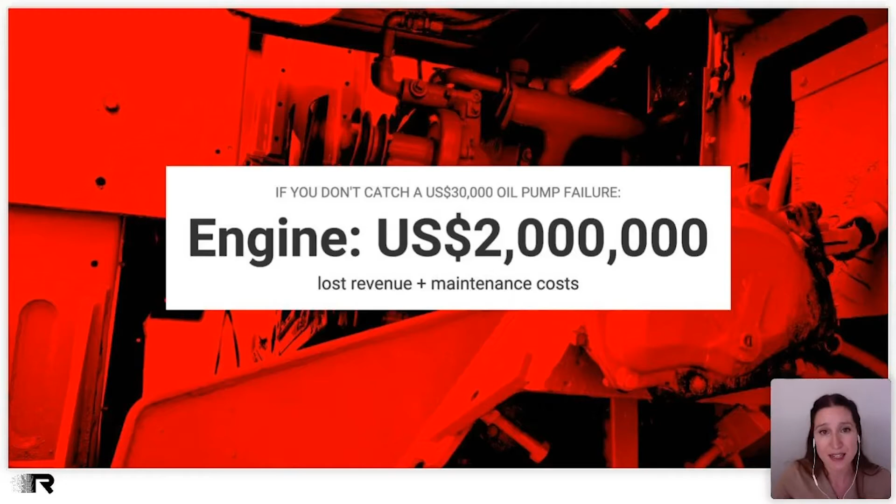That's why even though most of the bigger mining companies are collecting data now, and some are even doing advanced analytics, they're still struggling to make enough sense of that data to prevent catastrophic equipment failures. That's why they're still spending anywhere between 20 and 50% of their annual operating budgets on maintenance, with reduced revenue from all that downtime having an even bigger financial impact.

So after Teck, Kevin took a sabbatical to study artificial intelligence and machine learning. That's when he understood that these were the methods that could finally take all of that data he and Chris had worked so hard to get for the mines and turn it into actionable information.

So Kevin started Rithmik, and Chris and I jumped on board. Chris was as excited as Kevin to finish what they had started. And for my part, I really wanted to build a company where the sort of collaboration I saw between the two of them was the norm.

We also all wanted to help the planet, and increasing the efficiency of mining equipment provides a really huge opportunity to do that. According to a study published in the Journal of Sustainable Mining, when you increase the reliability of a mining haul truck from 60% to 75%, you decrease its fuel consumption and greenhouse gas emissions by 15.6%.

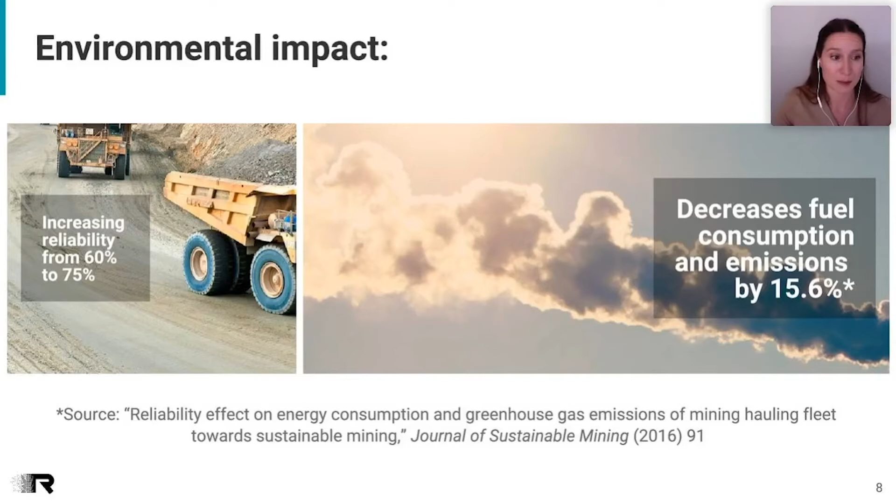So what we've developed is a product called Asset Health Analyzer, AHA for short. It uses machine learning to automatically sift through all of that data and draw people's attention to precisely where the issues are. And it does that early enough so that mines can take action to prevent small problems from turning into big problems.

And it does all of that in a very unique way, because throughout AHA's development, we kept in mind the fact that, as Mark was alluding to, there is arguably nowhere in the world where deploying new technologies is tougher than it is in a mine. In addition to some of the reasons that Mark listed, you're also dealing with things like constant topographic changes, extreme high and low temperatures, and in a lot of cases, you're also facing some resistance from people when it comes to implementing new systems.

So we're addressing those challenges in a number of ways. Underlying our Asset Health Analyzer is a rapid analytics infrastructure that lets us tune our AI models to a specific environment in less than a week. And the reason we do that is that the same sensor values on the same models of equipment can actually

mean very different things depending on the part of the world that you're in, what season it is, and the type of material that you're moving, which means that the kind of cookie cutter approach to artificial intelligence that might work in something like a fixed plant just doesn't work when you're dealing with mobile mining equipment. And our product takes that into account.

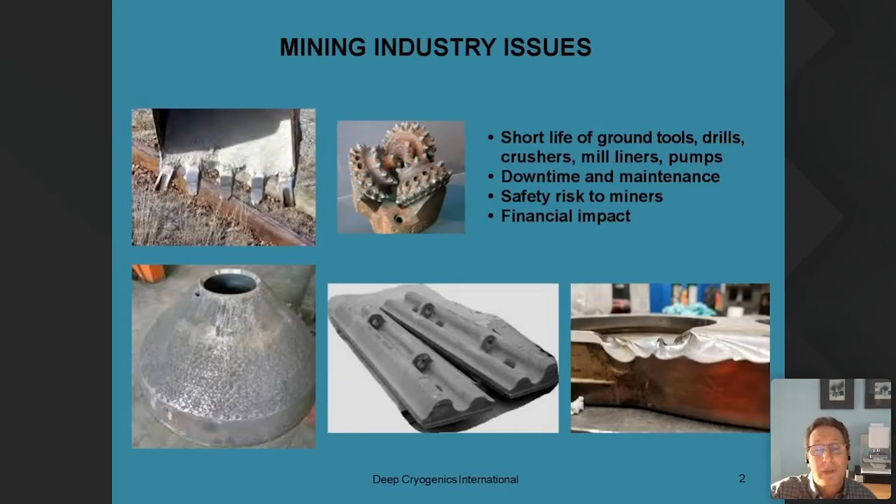So what is deep cryogenics? It's essentially a cold thermal process that picks up after heat treating, allowing an item to last approximately 20 to 70% longer in its abrasive wear life than it did when it was just heat treated. The process is very fast, it's extremely effective, it's low cost, and lastly, it's environmentally sound.

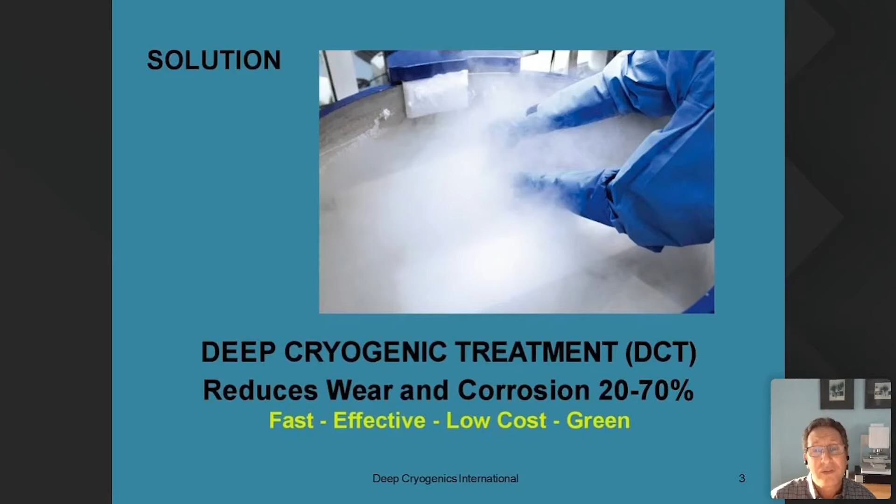Generally speaking, you're going to get 20 to 70% improvement across all types of materials that are ferric, some non-ferrous materials, but mostly those hardened materials used extensively throughout mining products. What happens during this process, which is a diffusionless kinetic process, is effectively the grain structure gets a little bit smaller. There's a switch from an austenite to a martensite structure. Carbide particles precipitate out through the matrix, and they act as abrasion resistant components within the metal to stop it from wearing down at the same rate that is normal for most OEM or even aftermarket parts.

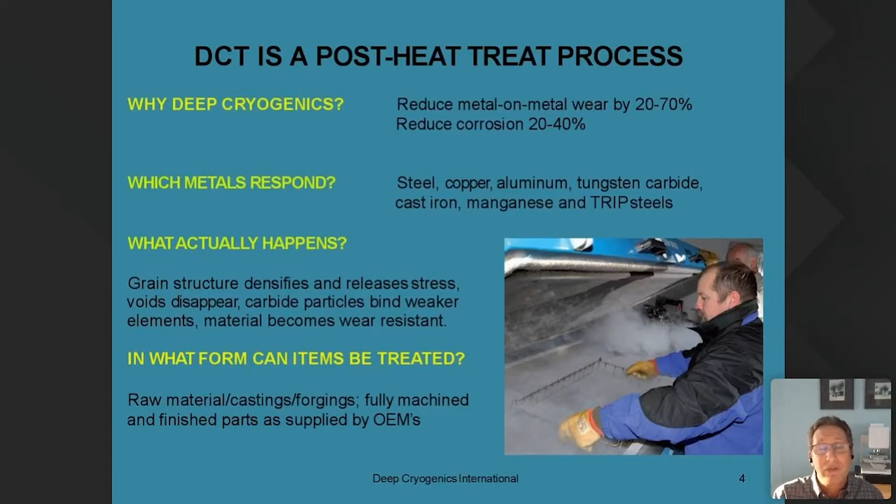Most of these items can be treated in the raw material stage, as castings or forgings, or even as finished parts supplied by an OEM. The advantage of the process is that it only costs about 10% of the original item to get between 20 and 70% life extension, so you're never upside down, you're always on the positive side. It doesn't change dimensional size, it leaves no chemicals or waste behind, and it's actually employed currently in lots of different automotive, engine, and machining applications. It's currently on the forefront in mining, in marine, and we're using it on wind turbines as well.

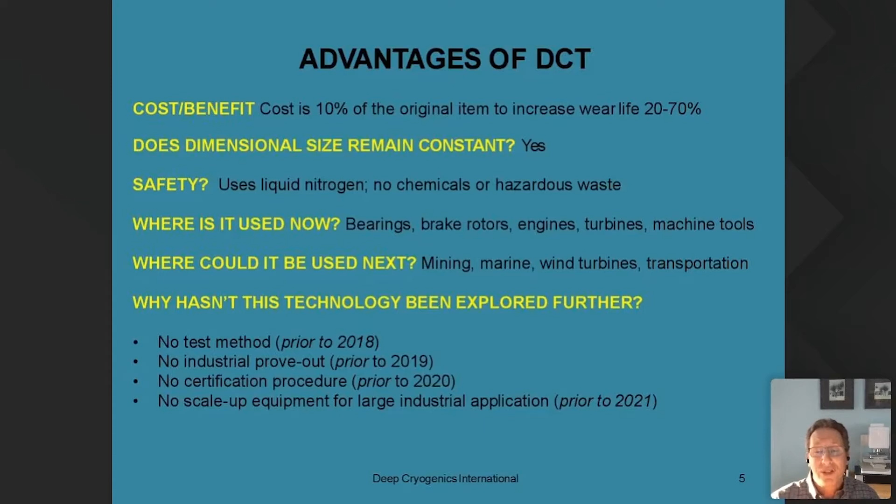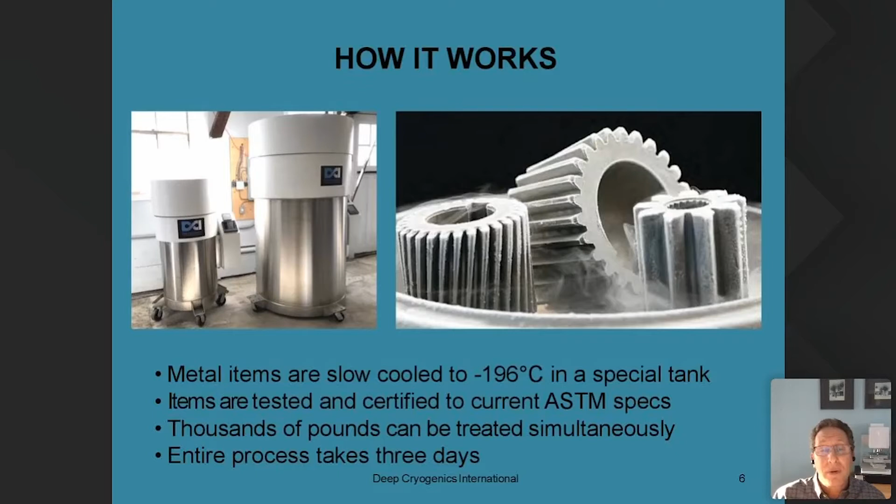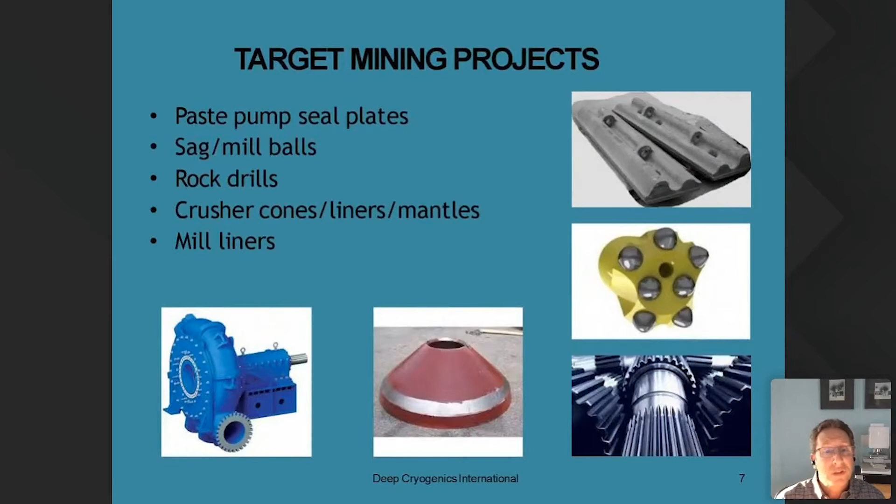The way the process works is that over a period of about 8 hours, items are slow cooled in a tank, and then for a period of about a day, they undergo this cold thermal process. Many thousands of pounds can be treated simultaneously, and the entire process takes about 3 days. Seen in these slides are the target items that could be treated: crusher cones, slurry pumps, mill liners, drill bits, and gears.

Currently, we have customers in mining who are trying out the process, and many who have already tried it out and are now starting to do some production work. We're also engaged with the Canadian Coast Guard to treat a variety of different chain components, and with one of the larger manufacturers of wind turbines, Vestas.

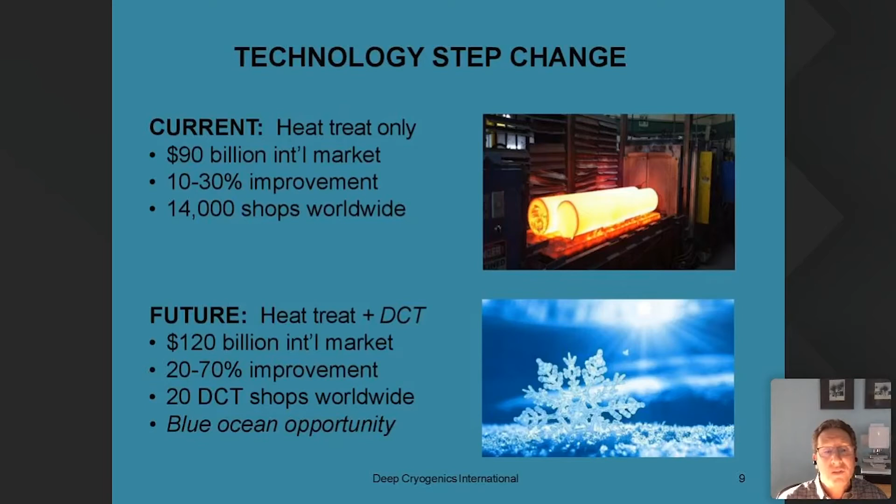So the technology is a step change, because almost all metal parts in mining are currently only heat treated—none of them are deep cryogenically treated. The improvement they get is 10 to 30%, and there are about 14,000 shops worldwide that provide that service. We see the opportunity with deep cryogenic treatment, which is after heat treat, to add almost 25% to the existing market. Because the improvement is so much more than is available with heat treat, it's a very significant opportunity, and there are only 20 shops worldwide, so it truly is a blue ocean opportunity.

The company has been around since 2010. We incorporated in 2019 in Canada, and we did our original work making our bones, doing prove-out on the technology with MIT and Rolls-Royce, and through numerous US Army studies. It's recommended heavily by NIST. We have several patents and others pending.

We also have a recent certification on the items, as well as our trademark, which is making things last longer. And we have a pretty good advisory group with Rob Stevens, formerly of Teck, Alistair Ross, who's been mentioned several times, and Hani Henein from the University of Alberta, a materials scientist and senior professor.

Our technology really is all about that intersection between lowering carbon footprint, reducing the use of diesel to resupply items, increasing the safety for miners who might otherwise be exposed to items that, when they reach the end of their part life, like Amanda said, it could be very sudden. Production, increasing uptime of items, reducing downtime, and lastly, lowering consumable cost. Thank you very much.

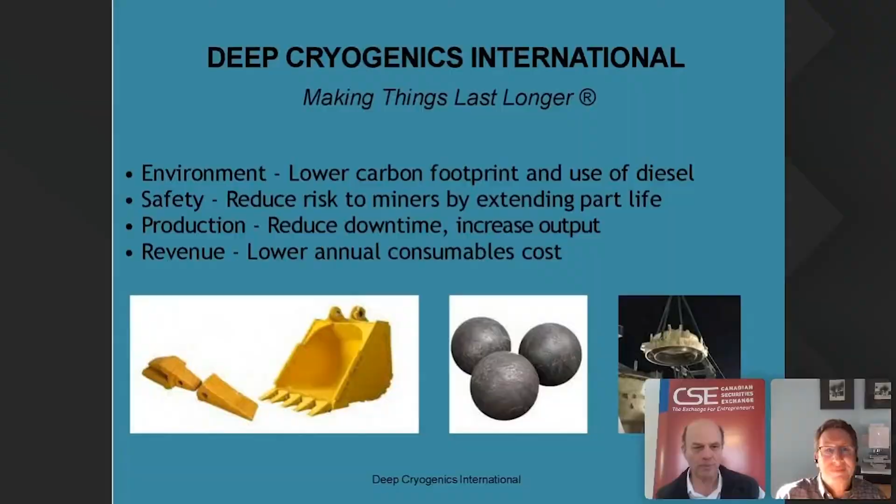And now Rod Steele. Rod is a mining and processing engineer with electronics experience and deep underground hard rock mining operations management. His first career took him to North America, Africa, Australia, and Europe. His second, in Sudbury, has been as co-owner with Claire Steele and also technical lead of TesMan, consultant on process design and implementation, a technology solutions provider.

Rod, it's yours. Thanks very much, Mark. So we're a small company in Sudbury. Our website's there if you're looking for information to contact us.

And what I want to talk to you about today is what we're doing to improve the mine tunneling cycle, both safety and economics.

So typical drill and blast tunneling in mines, as opposed to mechanical rock breaking in more civil tunnels. You've got a typical blast cycle of mucking the blasted material from the face, supporting the ground, preparing it to be drilled again safely, marking it up, drilling it, typically about 5-meter depth holes in North American and Australian mines. Clean the holes, load them with explosives, sequence the connection and detonators depending on what you found in the conditions in the holes. Blast it, ventilate the tunnel so that people can re-access.

And behind that, you're advancing service lines, which is basically the energy for the process: communication, ventilation, drain water, compressed air, and process water.

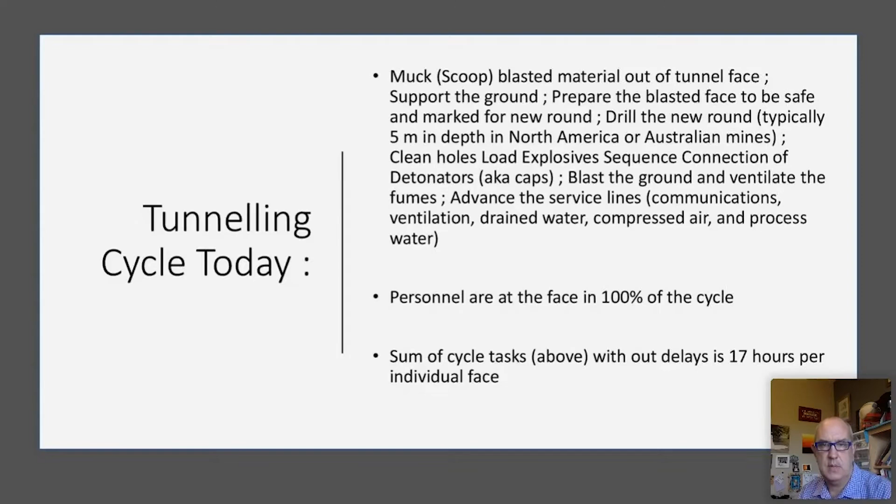So our technology that we focused on is remote explosive cleaning and loading. So after the drill holes have been drilled, we've got to clean them out and load the explosives. And today, the operator is at the face for that entire process.

I should also mention that after a number of accidents, incidents, and risk at the face, a lot of operators and mines nowadays are actually putting screen support on the faces. Probably in about the last 5 years, we've seen that more and more.

Technology exists today if you want to remove the operators 5 meters back from the face on all — or I should say most — of the other tasks, except the drill hole cleaning and explosive loading. So we chose that niche to focus on, because it would then enable the operator to be 6 meters back from the face, outside of the 5-meter offset, to complete the drill hole cleaning and explosive loading. The relevance of the 5 meters is that that's a typical single round advance. Obviously, the technology is scalable if we're going for longer or larger advances.

So I'm going to be showing you examples of our small footprint design, which is our first one.

The other element we are focusing heavily on is producing data-assisted loading for daily planning of tasks in the mines. Referring to one of the companies earlier in the presentation, there is a lot of data. If you have the right data coming out, and if you can analyze it correctly and filter out what's right for the decision you're trying to make, then you're process improving dramatically, and more importantly, steering the entire ship in the direction of productivity or safety you're aiming for.

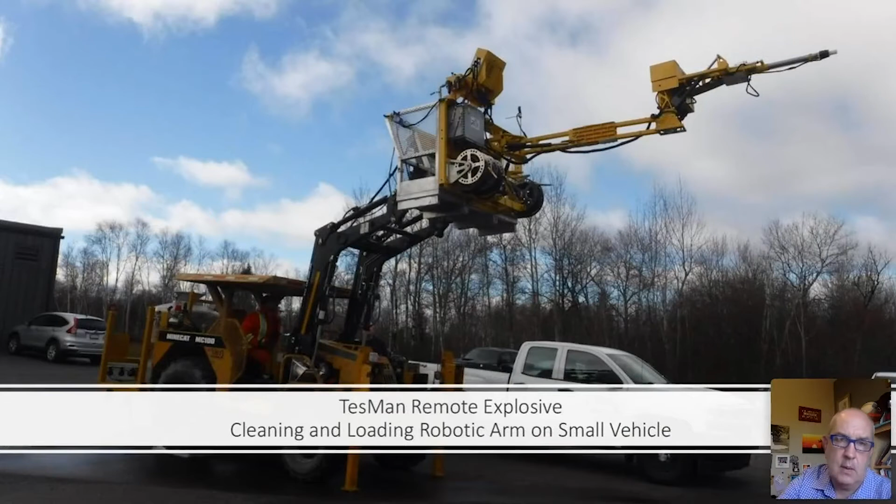I'm going to show you a series of pictures so you can get a visual. What you see here is a very small footprint vehicle, only about 60 inches wide, made by Minecat. You can see this explosives tank on the back. This one has tractor arms instead of a boom, so it's suitable for gold mining, which is narrow vein, all the way up to bulk mining, base metals, etc. The technology we have is predominantly this yellow arm assembly, a robotic arm assembly with the operator station on a quick connect on the front of the operator basket.

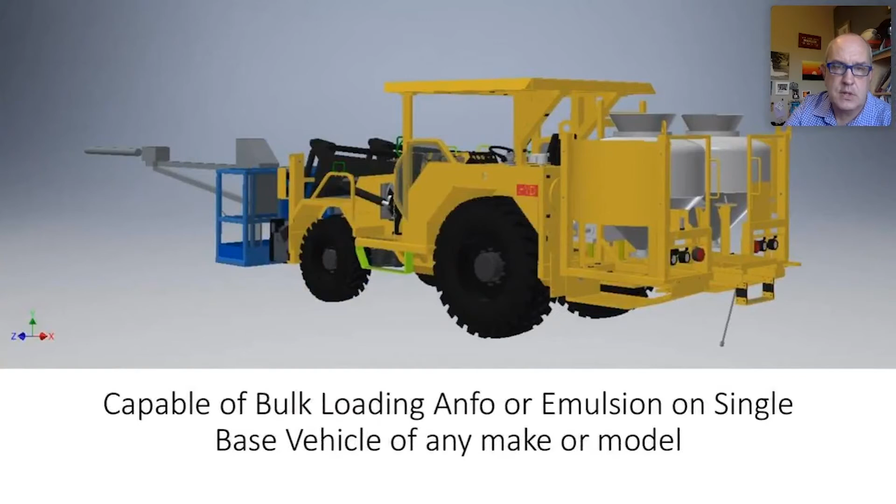This is just a render to show the extent of products you can put through the single arm at the same time. We have patents around elements of the cleaning and vision systems we use on it, and one is that we can run multiple cleaning and loading tools through the same single point into the face. In this case, I'm showing a simple render of a bulk emulsion tank and a bulk ANFO tank, both of which we tested on this kind of platform.

The question would come up, can we use other platforms? The answer is yes. Essentially, where you see the blue basket, the render of the arm can attach to any basket, any boom, any tractor arms, on any make and model.

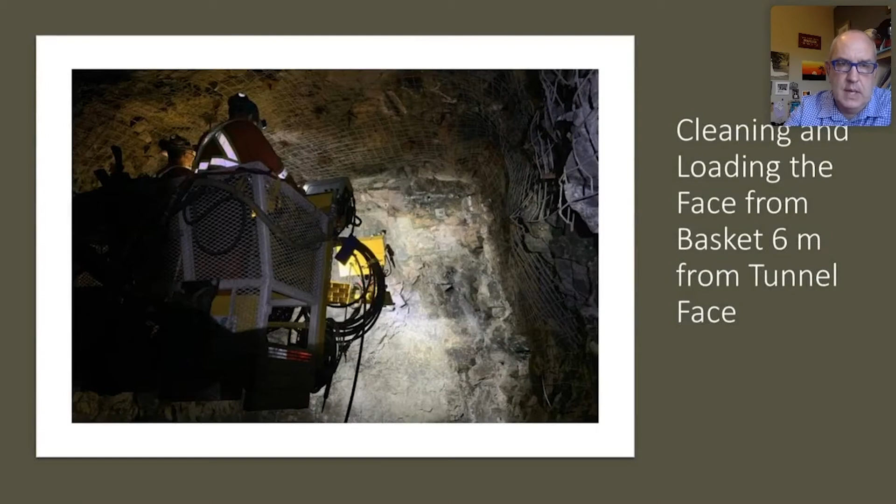This is a photograph showing a couple of operators in the basket. The basket has no canopy, which is not very typical nowadays. The reason there's no canopy on this particular basket is that in working with mining clients through the testing phase, we got to a point where the operators are 6 meters away from the face, so the need for the canopy was nullified. This may or may not hold true in highly seismic events, depending on your safety zone.

This is showing the arm extended out, and you can see the tip of the loading arm going towards the face. This is an unbolted face, extending ahead of the ground support. This was a round that had broken ahead with very bad ground, lost a couple of holes, so we had to come back in and reload a couple of holes. You can see them up on top of the face, hence unground supported. We were able to drive back in, clean, load, and fire them again.

So what are the benefits of a 5-meter cycle, and why are we now testing it in 2020 in the Sudbury Basin in one of the local mines? The first is it removes the operator 6 meters from the risk exposure at the tunnel face in all conditions. In Canadian mines, what's pertinent, more so than some shallower mines, is that they're deeper—in the basin, we're looking at getting down to 18,000 feet. The person is removed from the face, and there's also potential for staggering the ground support and reducing the cycle from 17 hours to 11.

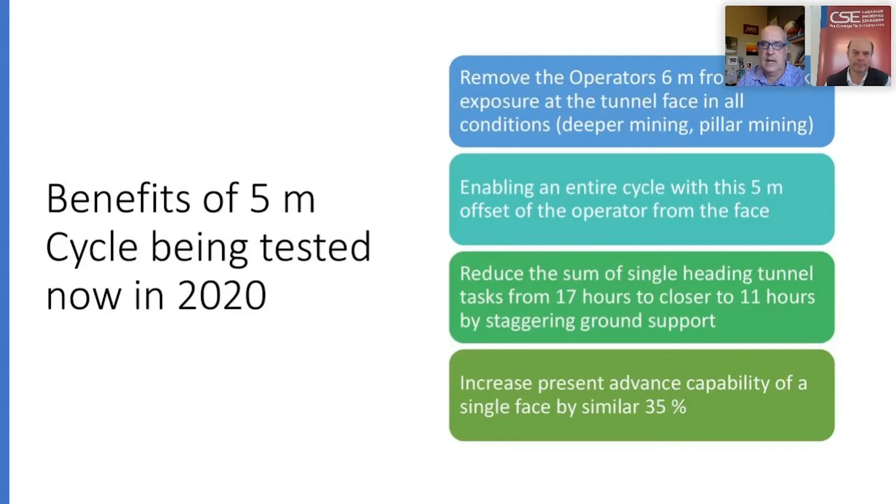This opens the door to another cycle in 2022, which would be a fully teleremote-capable cycle that could be run from surface. The potential is to reduce the cycle further from 11 hours down to a stretch of 6 hours.

Very good. Rod, I'm afraid we're past the time. That's fine, thank you very much. Very good, thank you, Rod.

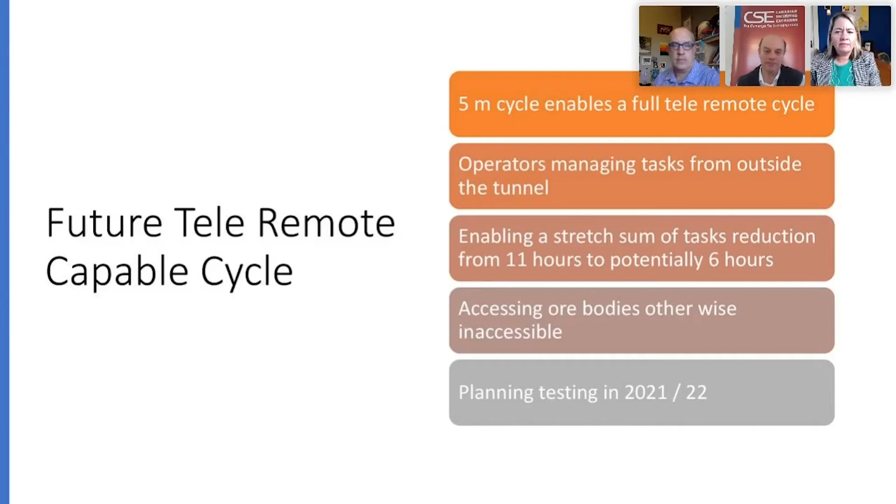Angela looks at hundreds of investment opportunities in various technologies each year, runs a team that reviews and makes investment decisions, and we are delighted to have her with us today. Angela, you are in charge.

Thank you so much, Mark, for that warm introduction. I want to compliment all three presenters on excellent presentations. I learned a lot, and I thought you did a wonderful job. So what I'd like to do with this Q&A session is generally start with questions that are relevant for most or all of you, and then I'll cue you to answer. I might throw something at you that you didn't expect, but trust me, I think you're up for it.

So let me start with an easy observation. It's super clear from the products and technologies you're bringing to the market that you're part of this wave of greatly enhancing the safety of the mining industry. So why don't we go in reverse order of presenters, starting with Rod. I'd like to give you just another minute to expand on where, specifically, the enhancements and impacts to safety in the industry your particular technology is responsible for.